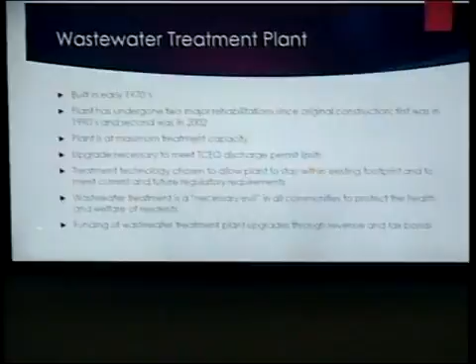Wastewater treatment is a necessary evil. It's in all communities, and it's there to protect the health and welfare of residents. It's not a subject we all like to discuss, especially at dinner time, but it is there, and it does serve a very important purpose.

The funding of our treatment plant upgrades are through a series of revenue bonds as well as tax bonds. Today, we're here to respectfully request some waivers from the Zoning Board of Adjustments, specifically, as Ron talked about, the setback requirement, and also a special exception regarding the screening, the fencing, and landscaping.

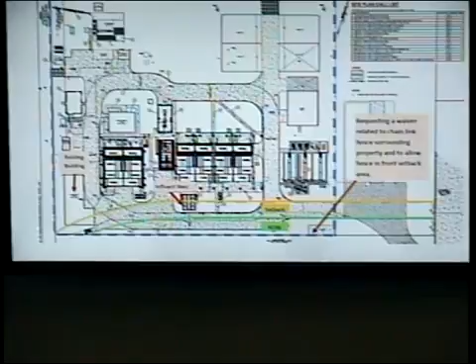This first drawing is just a quick overview of what the plant site looks like. You can see the yellow line, that is where the setback would come. You can see there is an influent weir that protrudes out in front of the setback area, I'll talk more about why that's necessary in a moment. You can also see an existing building already constructed there that comes into that setback area a small amount. The blue around the property represents the chain link fence that's there at this time.

So first, a little bit about the setback requirement. The ordinance requires a 25-foot wide setback adjacent to the right-of-way dedication. This requirement impacts an existing maintenance building that we have out there, and it also impacts that concrete influent weir. This weir structure cannot be relocated, it has to do with the hydraulic flow through the plant site to ensure we reach the efficient treatment that we need. So what we are asking for is to have the 25-foot setback completely waived.

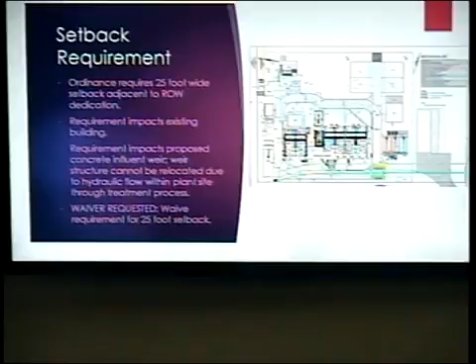The setback requirement does cause some hardships for us. The plant predates the town incorporation, and unfortunately, the site was not originally designed to conform with the town ordinances that we have in existence today, because of course they didn't exist at that time.

The plant design has to consider the proper elevations to ensure that the waste streams flow properly through the treatment process at specified rates. This original construction had to be implemented into the design. So unless we tear out everything and start all over again, we have to keep the plant as it is in certain areas.

Hydraulically, this new weir can't be relocated for the plant to function properly. The proposed location of the weir allows for equal flow to go through these membrane basins for treatment.

If we do not get adequate treatment, then we will of course have inadequately treated wastewater flowing into the golf course lakes, which are used to irrigate the golf course, and to the tributary that leads to Lake Grapevine.

At this time, the plant is accessible only by an access easement, which is unique to any other property within the town. The wastewater treatment plant serves a very important public purpose to protect the health and welfare, and it is owned by a political subdivision of the state. The property is unique as there's no other wastewater treatment plant in the town of Trophy Club.

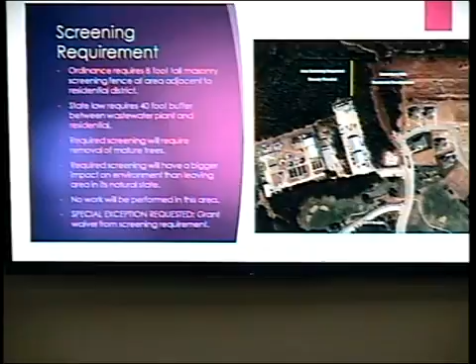If we were required to include the screening, it is going to require that we remove several large mature trees in that area. It will have a bigger impact on the environment than just leaving it in its natural state, there's a lot of large mature trees out there. No work is going to be performed in that area, and so we are asking for you all to grant a waiver from that screening requirement.

Some of the hardships that are caused: enforcement of the screening requirement will impose difficulty and unnecessary hardship, as mature trees will have to be removed. The installation of screening will have a greater impact on the environment and environmental conditions of the land than just leaving it in its natural state.

The state required buffer between the residential lots and a wastewater treatment plant ensures that there's adequate separation and no visibility to the plant site because of the dense natural vegetation. Granting this waiver will not result in diminution of surrounding properties, and it will benefit the public by maintaining the natural lands. Unlike other developments, the wastewater plant specifically serves a public purpose, and it's funded by the taxpayers and the ratepayers of the district.

The screening requirement places a financial burden on the tax and the ratepayers for now and in the future. Unlike other developers, where the developer funds these processes or projects, these are actually funded by the residents of Trophy Club and all of our ratepayers.

We went around the area just to show the visibility of the wastewater plant from different angles. Hershey Lane is adjacent to Junction Way, and you can see, if you're looking from these lots towards the wastewater plant, you really can't see anything with the vegetation.

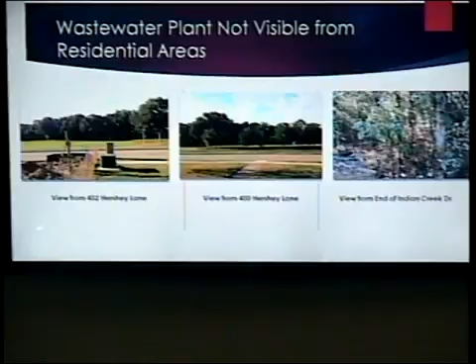Next, we would like to ask some waivers from the fencing requirements. The ordinance prohibits fencing in the front setback area adjacent to the right-of-way, and it does not permit the use of chain link fencing.

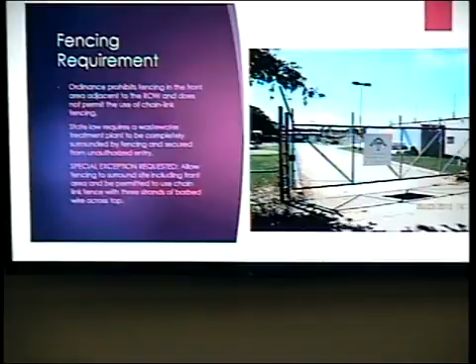State law does require that a wastewater treatment plant be completely surrounded by fencing, and it has to be secured from unauthorized entry. Our plant has open basins, which requires extra security with signage and similar measures. It is a very dangerous area; you would not want children to get in there.

We are asking to allow the fencing to continue surrounding the site, including the front area, and to be permitted to use chain link fence with 3 strands of barbed wire across the top. That is a requirement: if you use a 6-foot chain link fence, you must have 3 strands of barbed wire across the top. If you use an 8-foot chain link fence or other material, you need 1 strand of barbed wire across the top. So we will need barbed wire across the top of any type of fence.

Did you break it? I think I did. I'm not sure what happened there.

Some of the hardships due to the fence requirements: first, section 211.013 of the local government code states that the subchapter does not authorize the governing body of a municipality to require the removal or destruction of property that exists at the time the governing body implements the subchapter, if it is necessarily used in a public service business.

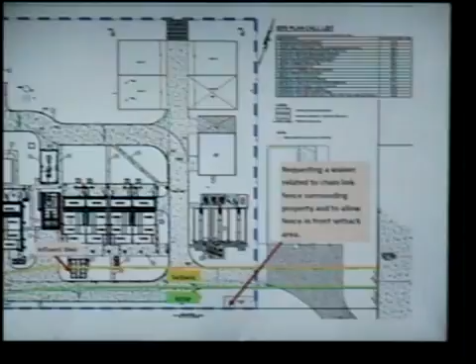Refresh my memory, where do all the influent lines run to and from? Kevin, you want to address this? Kevin Glover: All the influent lines come up to the northeast, the northwest corner, called the headworks. They come into there and are then pumped back to the influent weir structure, and from there it hydraulically flows back to the north.

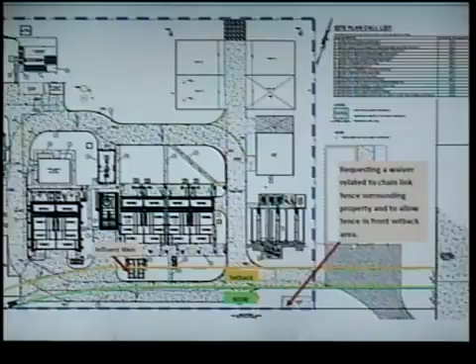So this wouldn't be a case of just moving the influent weir. It would be moving all of those lines and redesigning the whole internal plumbing of the plant. Yes, okay.

Bob Ratter, Chairman: Just to go over a couple things that Ms. McKnight stated, one of the things we need to take into consideration as a board is the Texas Administrative Code Environmental Quality, TCEQ, requires that a facility must be completely fenced, have a lockable gate at each access point. This is Chapter 217, Subchapter M, Rule 217.328. No facility containing an open tank, a facility having an open tank must have hazard signs stating danger, open tanks, no trespassing, within visible sighting of each other, as Ms. McKnight stated.

A facility containing an open tank must be surrounded by an intruder-resistant fence. That is: at least 8-foot solid material or chain link fence topped with at least 1 strand of barbed wire; at least 6-foot high solid material or chain link fence topped with 3 strands of barbed wire; or a 5-strand barbed wire fence may be used in rural areas for fencing lagoons or overland flow, which we do not have. A facility must have at least 1 all-weather access road with a driving surface situated above the 100-year floodplain.

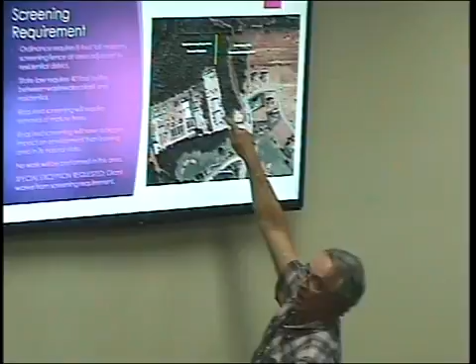If you come into that lot where the fence runs all the way to the bottom of that yellow, if you come into one of those three lots and look back, what you see is the back fence of the country club property. You cannot see the back fence of the sewer plant from any of those three lots. They're totally buffered by a huge amount of trees in here. Totally impossible to see it.

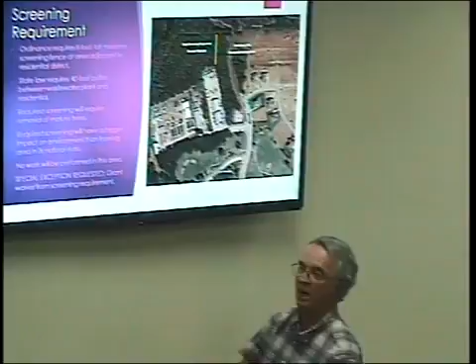So there's no, John, the only point I wanted to make - please step to the mic, they're having a hard time hearing you - the only point I wanted to make, John, is there are no homes that butt up against the sewer plant.

Okay, well thank you. Can I ask a question? Mike Biggs - if you're talking about running down Indian Creek, there are two homes there now, one on the corner and one next to it, because we granted the one on the corner a variance before. Then there's five more lots down there.

The wall that's there now, as near as I could tell when I walked it out there, goes down halfway through the next to last lot, and the last lot would be affected by not having this wall you're talking about. And the last lot is the one where it curves, in kind of a cul-de-sac - yeah, that one - goes way back to the telephone pole and the pin back there. But also, this yellow line shows to be right behind those lots.

Now, correct me if I'm wrong, didn't you guys, you're getting ready to approve a plat tonight on this thing, right? Now, there's a requirement for a 40-foot buffer, is there not, on that new plat, on the property that the water district owns? The Code of Ordinances requires a 40-foot landscape buffer, and the plat does show that.

So we haven't talked about that yet. So from that yellow line, there's another 40 feet back of landscape buffer. Will be after they approve the plat tonight, since we approved the other thing. Okay, so I think that's an important fact too. We're talking about this fence scenario down there. You're going to have 40 feet of landscape buffer required because it was platted now. So you've got another 40 feet of trees there and they can't build on that, can they? No, sir.

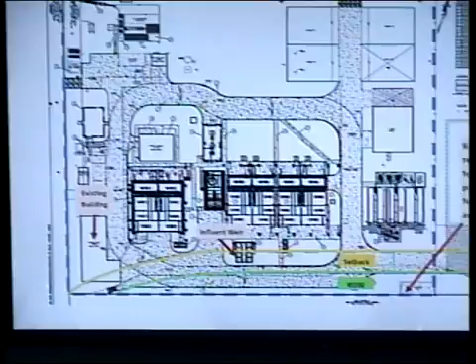Ron, are we saying that... I thought this was just for the front setback area.

One of the special exception requests is to allow the fence to extend beyond the front line of the primary structure, which effectively means there wouldn't be any front setback requirement for the fence. So where you see the blue line at the bottom there, that's part of the existing chain link fence, meaning it can remain where it is.

And the other special exception is that it can remain as a chain link fence, just along the southern portion of the site. So really, to sum up the request, it's leave the status quo as is, not really needing to change anything, just leave it as it currently exists.

Anything else? That's it. Can I ask one more question, or two? Michael? Actually, Mike Biggs.

When you were talking, when she was asking you about whether we can do it in time frames and things like that, based on the Mayor's comment about temporary fencing, is it possible to grant it as temporary fencing there until such time, if ever, the loop road is constructed?

What you could say is that it shall only apply to its current location. This special exception shall only apply to the fence in its current location. That way, if the road was ever built and required the fence to be moved back, and there would obviously be other logistical issues with that, the special exception would no longer apply in that case.